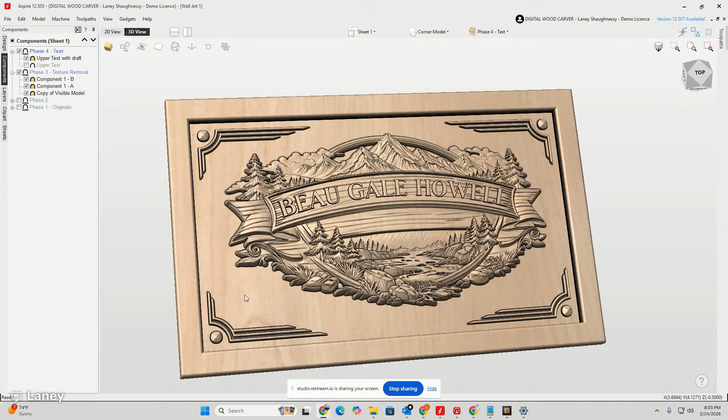So here is the sign, and we're going to talk about making these corner pieces here. We're going to talk about the text. This is the stage we were at when it all went awry, when everything went sideways. I was talking in the class, and as I was talking, I went to file to go hit save. I like keyboard shortcuts, Control S. Well, I accidentally hit the close button. Not paying attention, had no clue.

When the screen prompt popped up, it asked if I wanted to save the changes. By default, it's set to no. I did not even see the screen pop up. I just heard it, and I hit the enter key out of habit, not paying attention, and answered no to the question, do you want to save changes? So it shut down, and it was instant regret. So save early and save often. If you're into keyboard shortcuts, Control S is a good way to go.

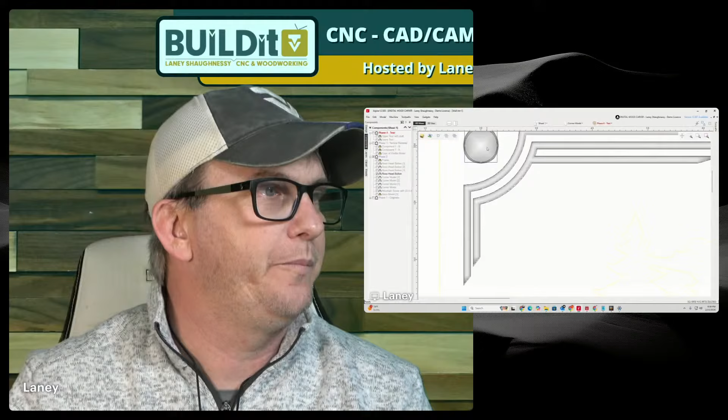We're going to come in here on this little button. Now, let's talk about the size of this. Currently, right now, we are roughly about a little over 5/8 of an inch. Okay, 0.6447, you know, we're just over 5/8 of an inch in diameter on this thing. And so imagine that little 5/8 of an inch over this 24 by 15 inch area. It's taking up just a few of those little points.

And so I'm going to take these two shapes here, and I'm going to drag a copy of them just over in this open area. And I'm going to turn off that original. Make sure I got everything turned off. And I'm going to recreate this button in this large area, and then I'm going to show you one way that we would probably want to do it so that we can see the detail and everything. Now, in the design tools, first thing I'm going to do is on this rectangle here, I'm going to use the create a smooth shape component tool.

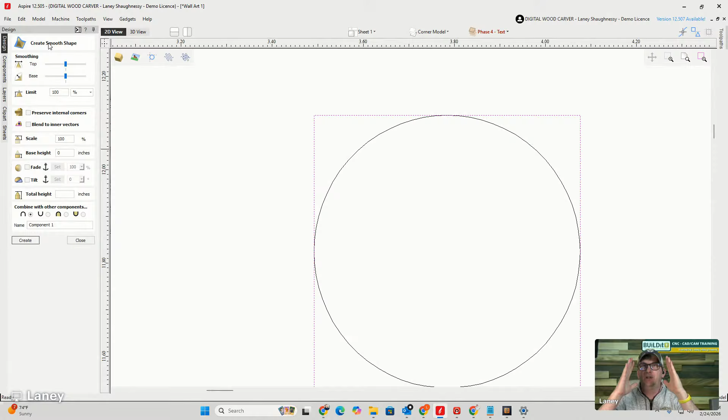And with the smooth shape tool, I can control the size of the top of this shape and the size of the bottom of this shape. And so when it comes up to this point, rounded surface and everything, I can control what it looks like. And so let's say that on this shape here, I want to go, we'll say, 40%. I want to put a base height, and let's kind of go to the 3D view so you can see this.

Also, very important, so I don't freeze up constantly, I'm going to turn this off and bring this back down. I'm going to bring it down a notch, so there's no struggling in our class tonight. Okay, let's go back over here and let's go into the 3D view. Now, it's important to make sure that whatever layer I'm working in, that layer is active so y'all can see what's going on. Now, let's go back to this component once again.

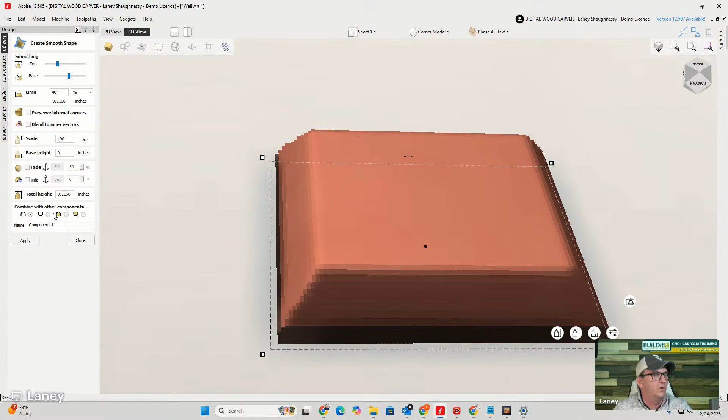All right, so here on this 40% shape, on this basic kind of rectangle, I want the top to be more narrow, and I want the base to be more wide. Now really look at what this model looks like on the screen. Right now, while I'm attempting to create this shape, it looks like something from, what's that movie that Jack Black was just recently in? Oh gosh, it's a kid's movie, but anyhow, looks like something from a video game where it's just all pixelated, right? And you really can't see what's going on with it until you let it kind of regenerate.

The shape in itself, and let's go a full 100% here on this, and let's click apply. And on the shape here, it's completely pixelated. If I was trying to model this, I'm not able to really see what's happening because this little bitty 5/8 thing is only taking up just a few pixels on this big project. So what's a better alternative that we have? Well, one of the alternatives that we have is sheets. We could create another sheet in the project, and this sheet, we could make it smaller.

So let's say that I come in here and add a new sheet. This will be my rose head button sample. And I can take these two vectors and copy them to that sheet. Now, instead of seeing this pixelated mess that I'm trying to work with, I can go over to this other sheet.

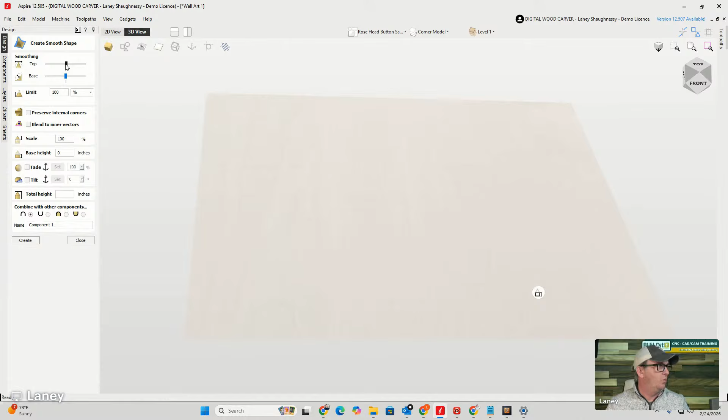Now this little 1 inch by 1 inch area is also working with that 8 million pixels, that extremely high resolution. All those pixels and points, all those rows and columns are condensed into this 1 inch by 1 inch area, which is what is going to give us better clarity when we're working with the part. So now when I'm working with this part, I can actually see what I'm creating much clearer, much cleaner.

So let's say, once again, I want to bring this down to, let's go 50%, and apply that. Actually, I don't want to limit. Limit was the wrong one. That's going to be 100%. I want my scale to be 50%. And I want to lower that down some. I want my base on here. Let's go 1/8 of an inch for the base.

And then I want to widen this out. I'm ballooning the base. So there's the top, there's the bottom. So I'm ballooning the bottom, keeping the top kind of narrow. As I slide this slide bar to the right, I'm ballooning that bottom out. Now the top, I could go very narrow, almost kind of conical, that point, or I could balloon it out this way. And I want to be right about here.

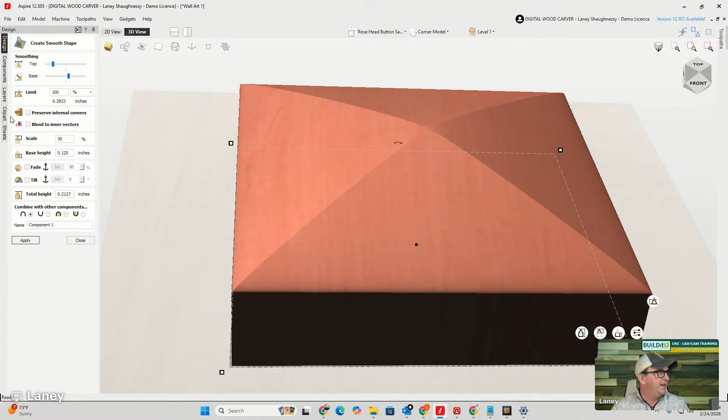If I need to preserve internal corners, that is going to make my inside corners straight and rigid. If I need to blend to inner vectors, I have that option as well. Well, I don't. I only have 1 square, and I just want to bring all 4 sides up. Want to be wide at the bottom, narrow at the top, not too narrow, where it's not pointy but slightly rounded. Want it low, think of like a head of a nail, and then I want to apply that.

But I'm able to work with this much cleaner. I'm able to see it very, very clear, so I can get my shape versus that pixeled mess that I was trying to shape over there that, every time I move it, it just jumbles up, and then I got to wait for it to reset. 8 million pixels in a 1 inch area versus 8 million pixels spread over a 24 by 15 inch area. A lot less concentration on that detail, right?

So if you have a large project and a small model area, make a smaller sheet that fits the size of the model. Do your modeling on that part, and then we can just move or copy that over to the bigger part. Now, mind you, when we bring it over to the bigger part, it is going to adopt that larger area, less pixels spread across it. But the part's already made. So we'll have a better visual.

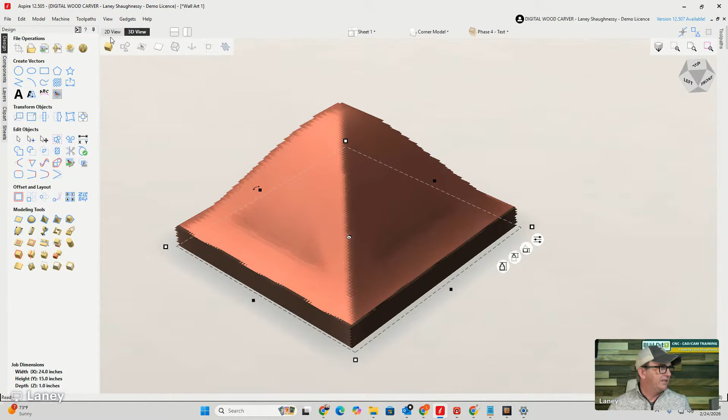And once again, just a real comparison here. Look at this versus this, right? And if I do anything at all with this part here, and I go to shape, look at the pixelation, right? We want to be able to see what we're modeling. So little tip: model in an area that's not much bigger than your model needs to be, and then we can bring it over. So let's go back to here.

And I want to add a draft to this part. So I'm going to come in here and add a small draft.

It's going to freeze me. While we're doing the draft, I had to stop the draft because I've got other models open that I need to close, or I need to make sure it's the only one I'm drafting on.

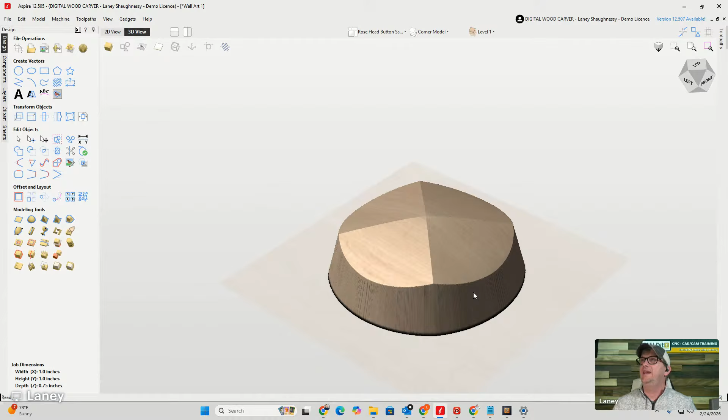All right. Anyhow, so now this is our little rose head button. Okay, or little rose head nail head, or whatever you want to call it, that we can now bring over into the design. So we can take this part and we can copy it to the sheet. And then once we have it in the sheet, then we can bring it over.

And if we come in and we take a look at the two parts side by side, that once crisp, clean, clear model that was in that little 1x1 area, which is this guy right here, is now pixelated in this larger environment. Again, small model taking up big, inside of a big space resolution.

That's why if we're working in creating modeling and everything, we want to work in a very, very high resolution because of this fact. If we were in a standard resolution in this, you wouldn't even be able to see the detail and you wouldn't even be able to see the 4 little points or anything. So keep that in mind when you're modeling. Doesn't hurt to make smaller sheets so you can really model and get the detail, and then you can bring those over to that larger environment.

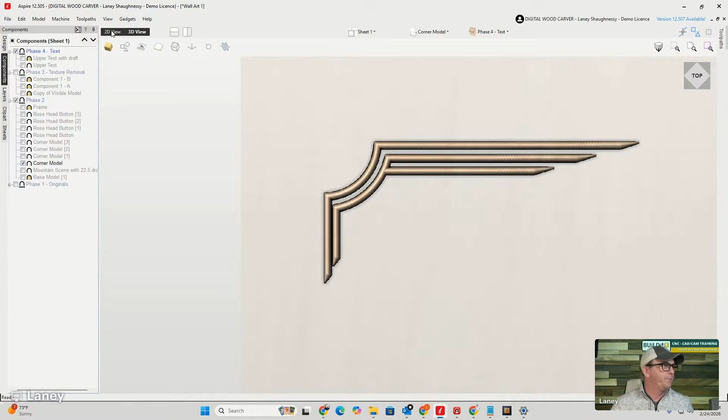All right, I'm going to show you how I designed and made these, then we'll move into the finishing of the design. So here, let's start from scratch. And I'm going to go into sheets. And I'm going to add a new sheet. We'll come work over here in this new sheet for a minute.

Now, when I do this, let's close this. When I do this, I want to make sure that rectangle, that little offset that's created, is selected, and I want to open up the rectangle tool after it's selected because I want to edit this particular rectangle. And I want to do an internal radius on it. So let's say that I do a 1 inch internal radius, and I create kind of this radius here.

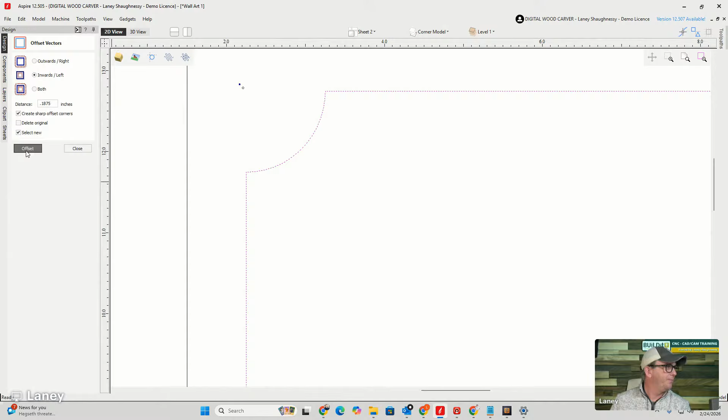Let's go. 3/16. And let me see here. Yeah, 3/16 is good. Okay. So now I'm going to do this some additional times. Now think of every two as one pair. That's going to be one model, one strip of the model. And so I want 3 models.

So I need to offset this inward. So that's going to be 1. These 2 right here will be 1 of those stripes. This will be the second stripe, and then I want 1 more. So we're going to offset inward. Okay. And this is going to create that frame all the way around. But all I care about is 1 corner, because once I make the 1 corner, I'll mirror it to the other sides.

All right. So here we're going to take a rectangle, and I'm going to decide right away how long and how narrow I want this design to be, meaning how long I want these stripes to be coming out, and then how short I want these lower ones, because that's what that corner element looks like. So I think I'm going to go just a little bit longer here, and we'll go with that. That'll be my corner piece, and that will be sufficient.

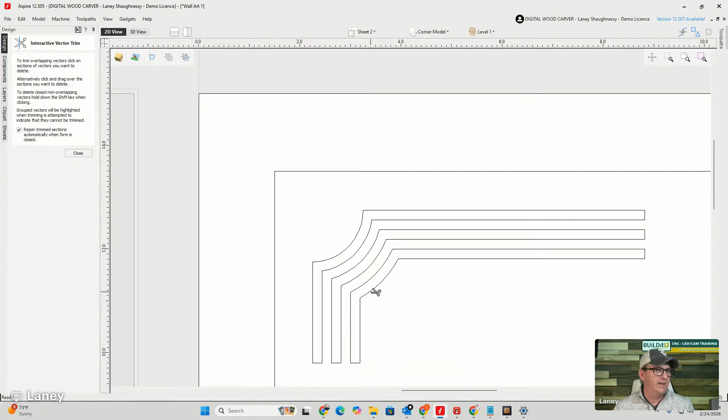And so from here, I'm going to take my scissors, and I'm going to eliminate everything else, just what's in the corner. Okay. And I'm going to come here and trim away this excess of this rectangle. Now I'm going to cut between each one of the stripes. Okay. Now there's my 3 separate stripes. Okay. So here we are with this.

Now, this particular stripe here, we're actually going to go into node editing, and we're going to cut the vector here and here where the curve starts to straighten out, on that downward motion. We're going to cut the vector in those corners. And then I actually want that to be closer to the main part here. So I'm going to just use my left arrow key, and I'm just going to bring it over closer. I'm going to go something about like that.

Now I'm going to take my extend tool, and I'm going to extend this line over to here and this one over to here. And then I'm going to take my scissors, and I'm going to trim there to reconnect that.

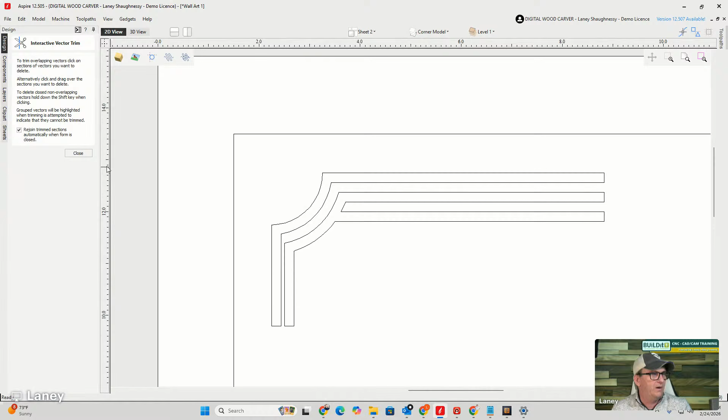Now, on here, I'm going to take this part and go into node editing, and I'm going to cut the vector here and here. I'm going to delete that lower section. And I'm going to have this with the extend tool. I'm going to extend this into this part here. And then I'm going to take the scissors and connect that together. So now I have this corner decoration here.

Now this could be conical, it could be rounded, it could be whatever shape you want. I'm going to go rounded, and I'm going to create the round, but it's too square right now. So I'm going to take a line from this top corner, and I'm going to go at a really kind of drastic angle here. No particular number and size, just what I think I would like. And let's go there just for kicks and giggles.

And I'm going to take the scissors. Once again, I'm going to cut off this excess, and then again, cut in between. So we have kind of that step shape now. And I'm going to do the same thing.

I'm going to do the same thing with a line here at the bottom. And you can try to have it the same angle. You can do whatever you want. It's whatever looks good to you, right? Whatever you think, if you're ever doing something creative like this. So we're going to cut off that corner and cut off in between there. So now this is my corner piece. Almost kind of looks like a wing, right?

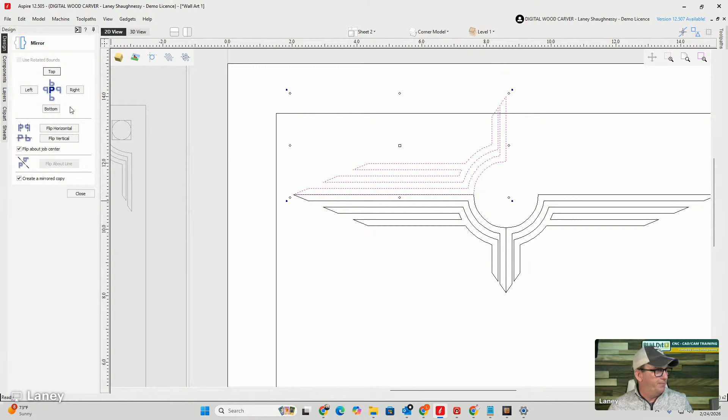So imagine, if you will, if I was doing some type of emblem, and I wanted to take this and flip it to the left to create something that looks almost like an Aztec eagle, right? You know what I mean? So that kind of effect, if you will. And let's say that I wanted to create something unique like this. It would be kind of like a medallion, whatever, right? So we're just creating a cool shape.

Whatever it is. All right, let's get rid of that and come back to our corner piece here and back in the corner. Now, when I take this corner piece, I'm going to use a rounded curved profile.

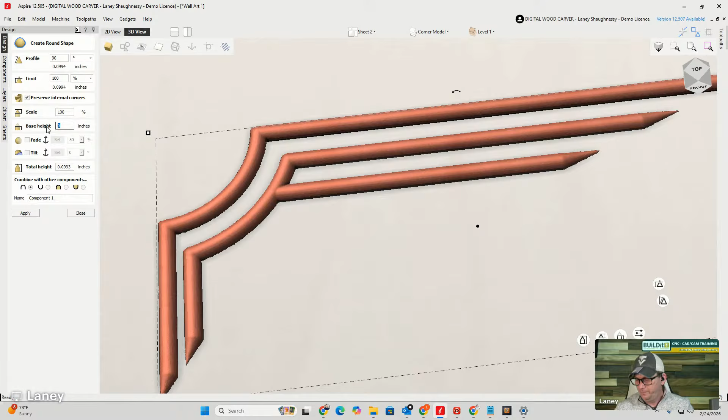Now, if we look at this part, this is kind of where we're at right now. Okay. Now I want to add a little bit of base to this. So on the base height, I can add 1/8 of an inch, 16th, something. I don't want too much base, just a little base. It's all about that base. Okay. So now here we are.

Now I'm going to take that part and I'm going to draft it out. And on this draft, we're going to have a little bit of a freeze up while it drafts this part. Audio loss, little freeze up and all that stuff. So give me just a moment and we'll make it happen. Here we go. Not that bad this time. All right, so there's our draft on that part.

Now let's go over to our rosehead button here, right? And let's copy that over to that other sheet. Let's bring that up into play here. Now, if I wanted to know where the center of this was so I could get it centered perfectly, if you remember, this original line here was a 3/4 inch radius internal curve, right? So I could take a circle with a 3/4 inch radius, and I could bring that circle... Oh, sorry, it's not a 3/4 inch radius. It's a 1 inch radius. There we go. And I could bring that into position.

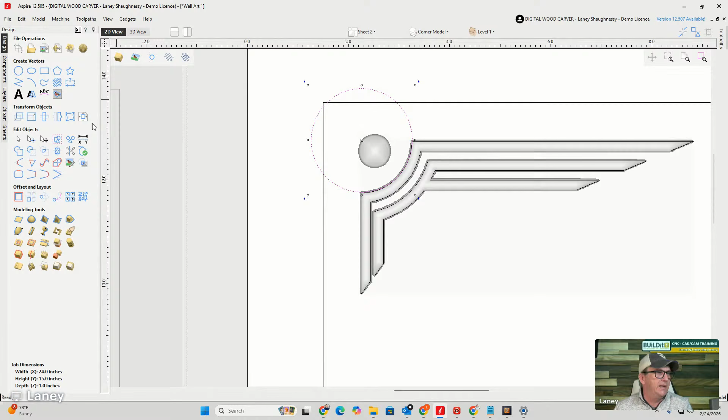Like that. And then if I wanted to, I could take this piece and snap it to the center of that circle, right? If I wanted that to be that far out, if I thought that would be more aesthetic looking, but I honestly think it looks a little bit better closer, so I'm going to bring it in closer. Now I am centered on this radius. So I could draw a 45-degree line here, and I could have my part follow that line to come in closer, depending on where I wanted to push it. We'll go right there. Get rid of that line.

And then I'm going to take all three of those parts. I'm going to mirror them, creating a mirrored copy, flipping about job center. I'm going to flip that horizontally, vertically, and horizontally again to create that little corner decor, right? So that's how we created that little corner decor.

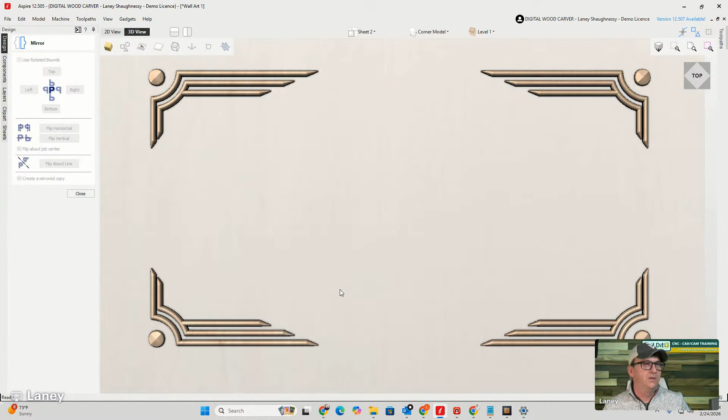And so going back to the main project, when we turn on the components, that's what brings us to here. And you add that together with the 1.25" frame, the 3D model, and everything, and you're starting to get something that looks pretty decent.

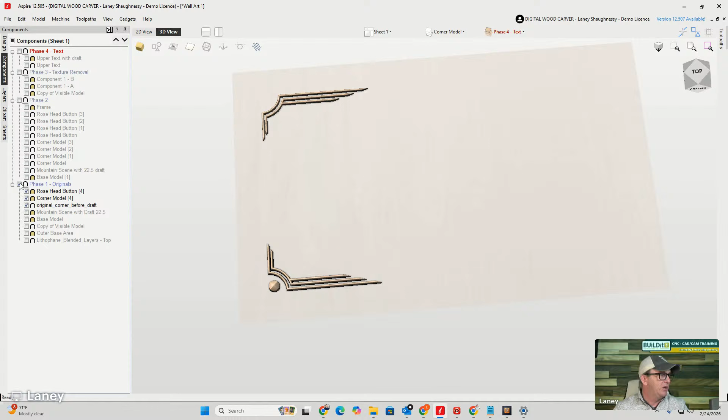So with the originals in phase one, we can create what's called another level, a new level. So in the case of this, these originals are turned off, and then phase two begins. Now, phase two is everything you see here. It's almost the completed model, everything put together, minus the text, right? Phase two is building the frame, the background, the little corner pieces and everything, and getting it all laid out.

Once phase two comes into play, now I'm going to have to start removing this grain on the ribbon so that I can lay the text on there without it taking on the texture that's underneath it. And in the last class, Friday, we had gotten that far, and I was showing you how to remove the texture and then how to tilt and fade the little addition we added in there to create a smooth foundation. We're going to do that really quickly again tonight, but this is phase two. So now we have here, this is that completed frame.

Now in the next phase, I have to start destroying that ribbon, getting rid of the grain, cutting it around the letters and all that. Don't want that to happen to the original. So we create a copy of the visible model and we put it in phase three. So we come into phase three, turn off phase two, our originals, and come into phase three here. And you can name it whatever you want. I just named it phase three. And phase three is that copy of the visible model that was down below from phase two transferred up here.

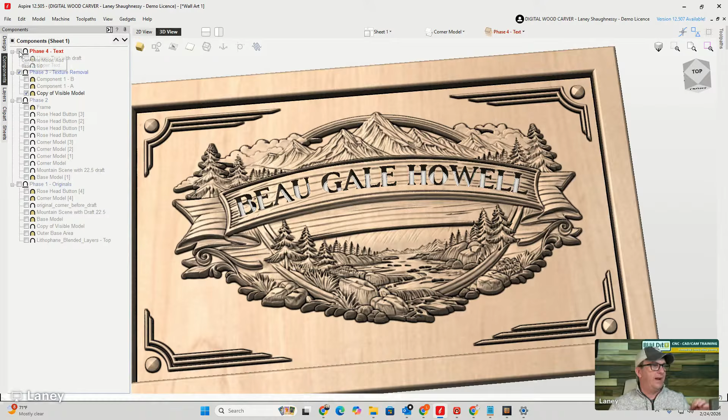And let's say that I created phase two, which is the completed frame and everything. Now phase two could be my template for anybody's name and wedding date, or family name, or it could be anything in this banner now, right? Not just this one name I'm doing on this one project. I now have a completed frame that I could put any text on, any name on. So in this case, phase three is the texture removal. That's what I named it, texture removal. And then phase four is where we're adding the text back and everything, right?

Now, I want to show you in here on this text one of the things that had to be done in order for the text to lay as cleanly as it is. And again, we're gonna move on.

Man, time is flying. It's already 51 minutes into this class. Lord of mercy. I thought 15 minutes at the most. All right, so hang with me tonight. We're going to get through this.

So let's talk about this, because I want you to know these phases before we get into the final toolpathing and stuff, because we're going to do one more set of text down here that's already ready to go. But let's take a look at phase 3 for a moment. If I turn off the text here, we'll see that phase 3 has had the texture removed, and it's brought up a certain level so that our text can lay on top of it to create that flat surface and everything.

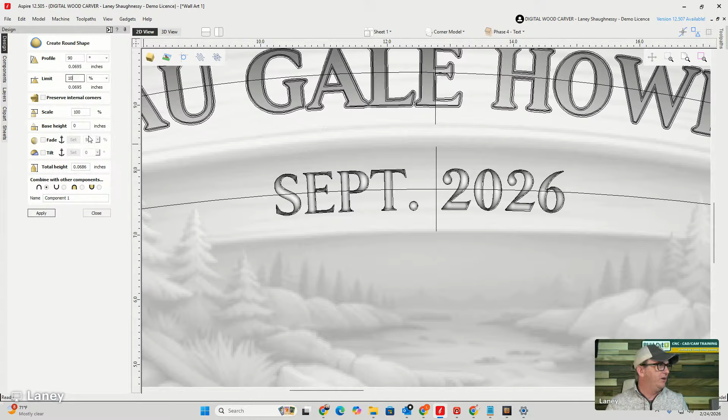And if I didn't do this, let's say here on this September, I come in here and I'm going to build this up 90 degrees. I want rounded over edges. I'm going to cut that 90 degrees off at 10%. I want it to flatten off at 10% as it builds up to that dome. At 10% of that build, it's flattening off, and that's going to give me rounded over edges. And I like adding a little 1/16 of an inch base behind it.

When I apply this and we look at it, we can see that the September and the 2026 are taking on the rough grain beneath it, right? So our goal is we want that smooth versus this rough and hilly, lumps and bumps and all that wonderful jazz. So in order to do that, we made some extra vectors going on here.

So the first thing is, once the text is created, we want to add the draft to it. And then we want to create a vector profile around that text for the draft. And so we're going to do that with the September. We're going to right click and say show only this. Let's try that again. Show only this. So that way we're looking at this text here. A little rough around the edges. But we're going to come in here and add the draft to it. Okay, and what that's going to do is just build it out some.

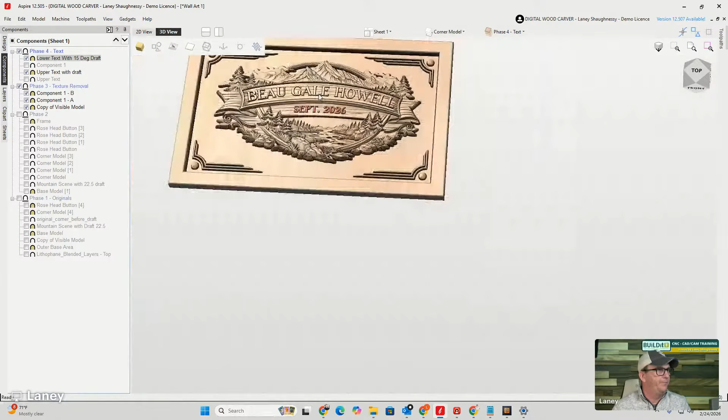And what I want you to see here, let's turn off the lower text just for a second. On this upper text, turn that off for a second. Here, you're going to notice there's component 1B and 1A. Those vectors that filled in that hole with the flatness, because they are at different levels, it was split. The model was split into two pieces.

So this component is, let's turn off the copy of the visible model. Come back. 1B is one side of this model. 1A is the other side of this model. It was split, literally like a line cut right down the middle. And the reason for this is so that not a tilt, but a fade could be applied to this, because it was low in the middle, high on the ends. Creating a fade makes the model disappear, so it actually lowers at the end. We'll do the fade on the next one.

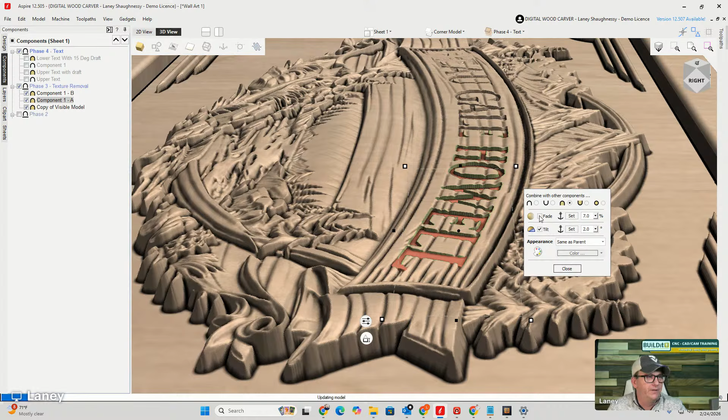And let's zoom in on this part. If I were to go into the properties, we have a 7% fade. Now, if I turn the fade off, you would see how it's low below the surface here, but it's high over here.

Naturally, because it's kind of straight, but that ribbon gets a little bit smaller as it goes out from the center of the actual part, right? So the 7% fade faded from the start of it to the end, faded away. And you can only fade the component once. You can't fade it twice, only once.

So that whole name, Beau Gale Howell, had to get split down the middle so I could put a 7% fade on the right side and a 7% fade on the left side. So from the center, it would fade both ends, dropping them down, disappearing into the other component. So that 7% fade just fades away and levels it out, basically, depending on what percentage you use.

If I would have kept the whole name as one model, I would only be able to fade the whole thing. And that's not what it needed. If I tilt it, it's like a teeter-totter, or if I fade from one end to the other, that still leaves this end high. So I had to split the model. And there's different things that you'll learn that you have to do.

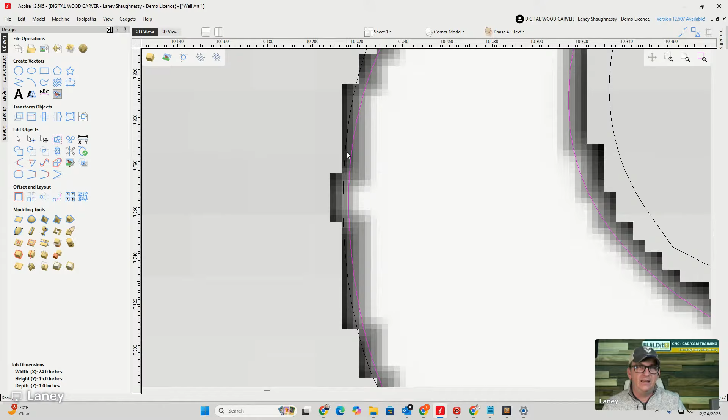Now, if I create that profile here, it's fine, but it really does not bring it out the way it needs to be. Parts of the model are still outside of that vector area. So not really the way to go. I need to offset this. So we're going to use the offset tool and offset outward a very small number, 0.01, 0.02, 0.03, whatever you need. When we take away that material, it's got to blend with the rest of the model so there's no holes or gaps.

So if I only went 0.01 and offset that outward, any area that's outside of that vector... So here's the vector here, and on that offset, there's still part of that model there. And now when that gets gone, anything outside of that vector is going to be a hole, so I need it to merge and blend.

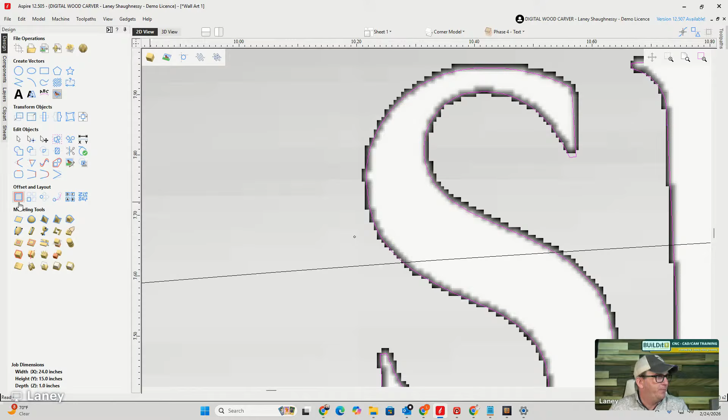So here's how we do this. First things first, we create a vector boundary around the selected component. That is step number 1, and that's what we use to remove the texture. But then on that boundary, we need to do our offsets outward. 0.01 isn't really going to fill in the area that I need to get the merge.

So I'm going to go 0.02. Let's go 0.03, a little under a 32nd of an inch, and let's create that here. And that's actually a lot, so we don't need to go that much. Let's go 0.02, be a little conservative. Good. So now we have 2 sets of vectors. The first vector is what we use to remove the texture. The second, the offset, is what we use to build back up the flat area.

So the first vector is selected. We come in here and select our component, which is the copy of the visible model. We have the vector selected with that component, and we want to remove everything inside of the vector. And that creates this hole.

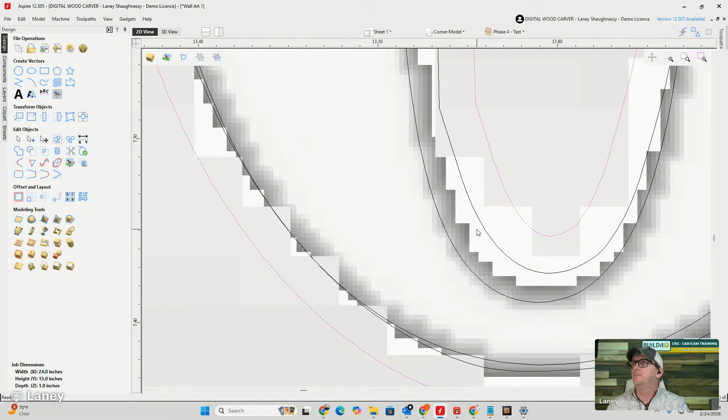When you're selecting the inside vector, if you do an offset, it's always the furthest one in for the furthest one out. Okay, so here I've got 3 vectors, and outside I've got 3 vectors. And so outside matches with inside, middle matches with middle, inside matches with outside, right on that. So if you ever have to do that.

Now, as I look here, you see that 0.02 doesn't quite get out there. So all those little white areas are going to be holes. That's why I went to that 0.03 to begin with. Because that's going to be a hole, a little bitty void. Small, but it's going to be a void, right? So we can't have that.

So I'm going to delete that offset, and we're going to make another one. Offset outward 0.03. I hope if I select the right vector, there we go. So now we can see all that white is inside that vector. Now that's the shape we're going to build up. So let's go in.

We're going to create a flat shape. I'll just give it some kind of base height to start with. Merge, not add, but the combine mode is merge.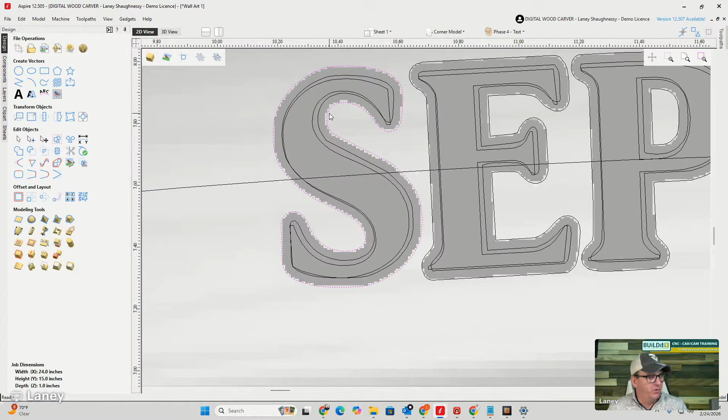It's very important that when you do your offset, let's back up, Jack. When you do your offset, hit group, select on it. When that gets created, click on it one time and then hit G on your keyboard, or go to the group tool and group that together. That way you don't have to sit there and click, click, click, click, and all that stuff.

All right, now it's very important to make sure that only this is selected when we build up that hole. So flat shape. I'm going to give it some height, 0.25. We want to merge that together. Okay, give it a second to rebuild. What you're seeing here is it's pushing up the sides because it's not merging.

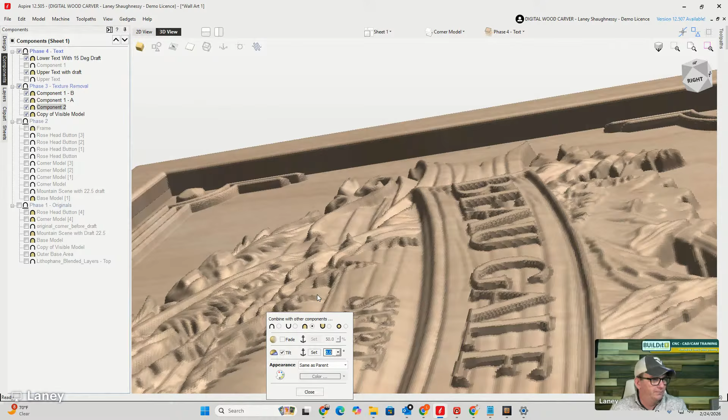So on the tilt, when we hit set, up here, we're going to click first because that's going to be the thin part of our wedge. And then we drag our little guideline down to here. That second click, the anchor has a number 2 at it now. We're going to click down here. And this way, when we add our, let me get back into position here. My mouse decided to take over.

When we start to add our tilt and everything, and again, that picks a large, small model, large area, but we have no choice in this situation because we're dealing with this big model in the background as well. So the tilt, I'm going to bring it to a 4-degree tilt. And then let's close that for a second. Let's come back in here. I need to bring my height up again. Start to kind of fill that in.

Now, currently right now, these little pixels and everything around, that is the model kind of pushing up, and there's some areas here that are kind of getting forced up with them. We'll get rid of those in just a second.

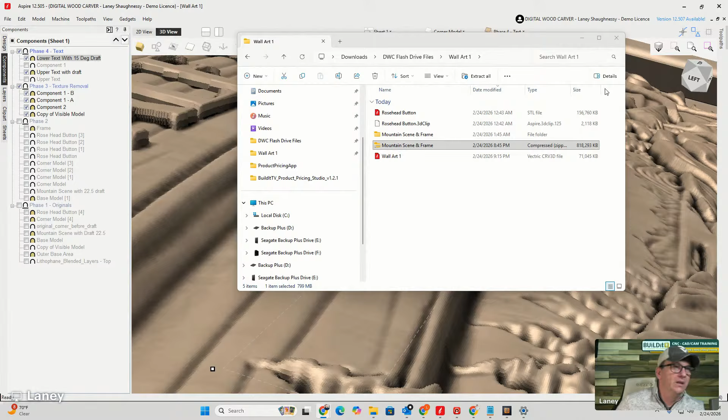Let's take our text for right now. Let's turn off the upper text for a second. Let's take our text and turn it off. There we go. And it's very important that, let me step back for a second. Let me change my base height. I think I was manipulating my tilt on my text, not my actual component. Give me just a second. Okay, let's bring that back up.

Okay, so once again, let's get back here really quickly. You see how high, because that model tilts down, right? And so we're high here and we're low on the front side of it. So if I put the text on top of it, it's going to be tilted like that. We don't want that. So I want to make sure that when I'm tilting, that I'm tilting this and not my text. I was tilting my text a minute ago.

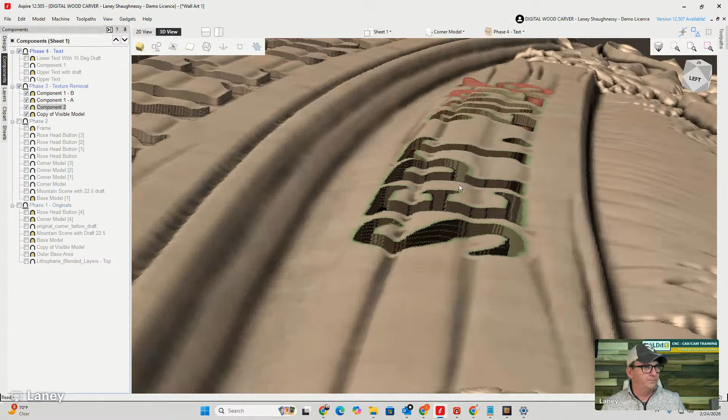So when we come here, we're going to click again up here at the top, down here at the bottom, and then we're going to add in that tilt. And what that's going to do is it's going to kind of level us out somewhat. Okay. And let's go with just a 4-degree tilt right now. And then I'm going to lift it back up.

Now, look here. I'm kind of the best I can be pretty much, I probably need to tilt back a little bit just to level this out a little bit more here. Think of it like I'm trying to create a straight plane, but notice how much I'm raised up over here. So if we turn this around, you can see that it's going at a ramp, right? And that's because the model's designed that way. That mountain scene is kind of going down.

So if we come in and look at this straight on and just tilt it straight up, you can see there's a ramp there. This is where fade comes in. The reason why is because I've already tilted. You can only tilt one time on the model. Now, here's the thing. I'd like to get this down, but if I fade, it's gonna fade gradually from one end to the other, right?

So if I put a fade on this whole thing, and when you're setting the fade, the area you want to keep is clicked first and the area you want to fade away is second. Okay. And by default, it jumps to 50%. Turn that 50% down.

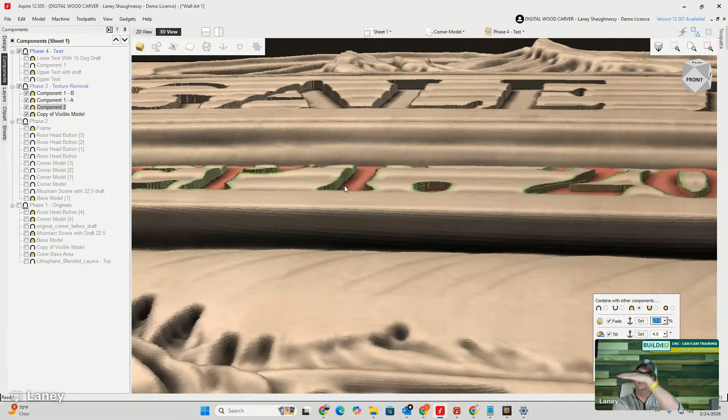As we come in here and fade, when I start to bring this side down to where it's somewhat inside there, well, the middle, it's really low. Instead of a full ramp tilt, there's a little bit of a wave there. So this is the perfect opportunity or the perfect reason why we would want to split a component.

So on this component, I'm just going to use this line that's already drawn here. This line was not meant for the split. It was drawn to represent a center line from point A to point B to create the center point of my arc, so that I could move this arc up and down to the center of this line. But since that line is there, might as well use it.

So in that component here, not the text, the filler. And speaking of that, let me give this a name. Rename. This is my lower filler. Now, I'm going to have that selected and this line selected, and I'm going to split this component. It'll split the component into two halves at that line point.

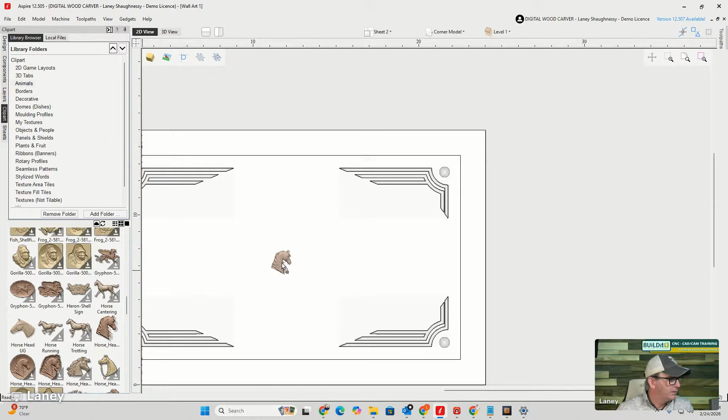What I'd like to do for just a quick second is move over to sheet 2, and I'm going to take a piece of clip art. I just want to really quickly demonstrate the use for the split tool. We see this component right here, this horse's head. I would actually like this horse's head to tilt a little bit more down. So I can freehand draw, going right at the base of its jaw, around the jaw, and then come up just right behind the ear.

Okay. At that point, let me bring this down past this model a little bit. I can take that component and that line, and I can split that component. So now there's two parts.

Now on this component, if I move the pivot point right to the back of the neck here, as I rotate this, first of all, don't grab the wrong point. This is the rotate handle, not that one, that's the size handle. As I rotate this, I can tilt the head. I actually want the head to tilt down a little bit further, so I'm going to go right about here.

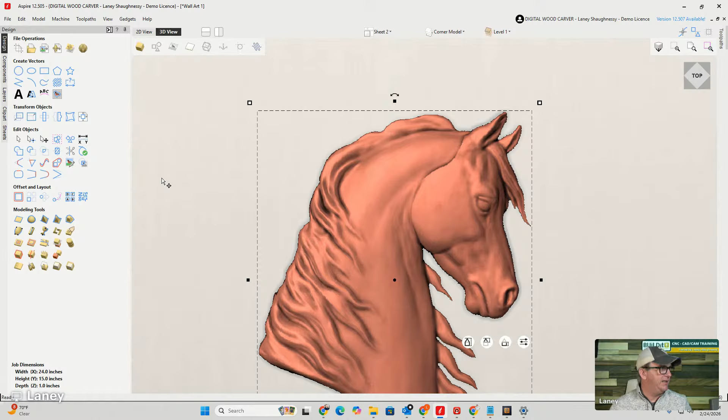And then I would be able to turn off everything except for the horse heads, and make a copy of this visible model. Turn off the two originals, and then I could take that copy into the sculpting tool. Turn the diameter down some. Oh, not smoothness, the diameter. And then I can start to clean up where the two parts were split. So now I have this horse with his head slightly tilted lower.

So that's the split tool. I can take a component, a model, whatever, draw a line, tell it to split, and it's going to cut it on that line. Then I can manipulate the two parts. That's just a quick and simple example of the split tool. All right, let's get back to business now.

So here on this text, I have split the Sept with the period and the 2026. Now, each of these components, filler A and filler B, are two separate fillers. So now I can work with them.

Ooh, I got an itch in my leg.

I can work with them individually. Let's do the 2026 first. On the 2026, which is filler A, I can tilt and fade these independently. And so we'll deal with the tilt first.

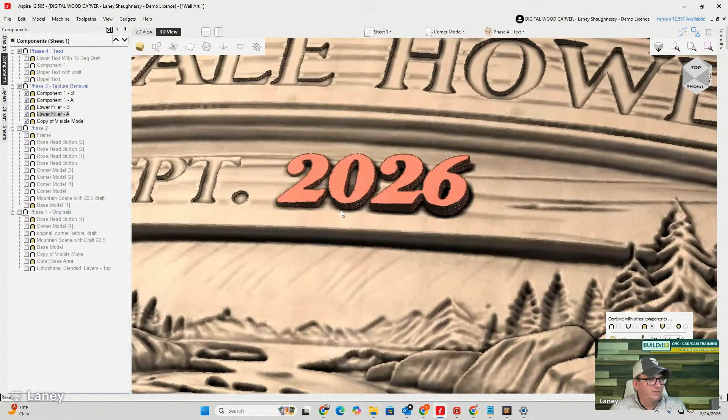So we can fade now, and it'll start to bring that down, right? Starts to disappear, starts to fade. Bring it down. So what I want to do is bring it to a point where I'm somewhat, again, level. Then I can work my height to bring it down a little bit closer to the surface here.

Let's actually go down just a little bit below. Okay. So that when I put the text on top of it, I'm inside of that area and it'll blend much better. Okay. So now I still have to do the left side, A. So let's turn the text off and let's go to filler. Let's see. That was filler B. Filler B. This is this side.

And again, we can see I'm deep down here, kind of high up here. Oops, don't move the model. Put it back. So I need to tilt. And for right now, I'll just raise this up to where the bottom is somewhat close to that surface. And then if I turn this to the side, you can see where I'm at here.

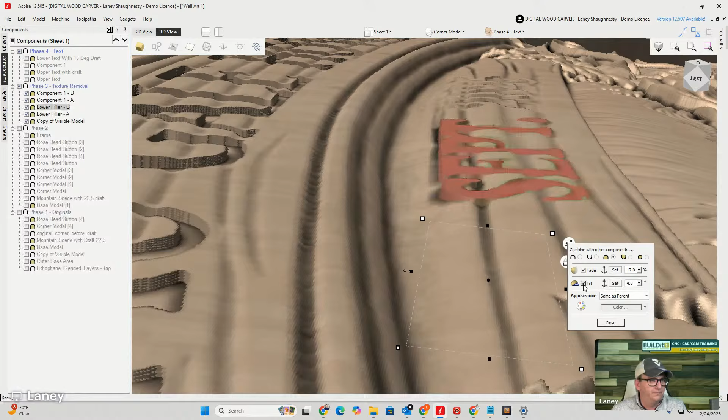And more so, it's not really a tilt, it's more of a fade, but that's okay. Because I have some different levels here. So I kind of want to fade one way or the other. We'll figure it out in just a second. But I'm pretty much leveled out here. So if we go into here on this component, that tilt is still there. Okay. And the fade is still there. Without the fade, this is what it looks like. You see that ramp. So that fade is still there.

And what I just need to do is really, let me come here. What I really need to do, this looks pretty well level here. I need to actually kind of switch it up. I want to fade this way some, tilt the other way. So we're going to go tilt. And this is the thick part of the wedge. This is going to be the thin part of the wedge over here because I need this to stay where it is, but I need to jack up the other side.

So thin part of the wedge on that tilt is here. Thick part of the wedge is over here. All right. And then I adjust the tilt accordingly. Let's see if you can see this. Kind of get it leveled out. Then get it brought down to my surface. And you can see, let's zoom in here. You can see that height there. Fade is going to go this way.

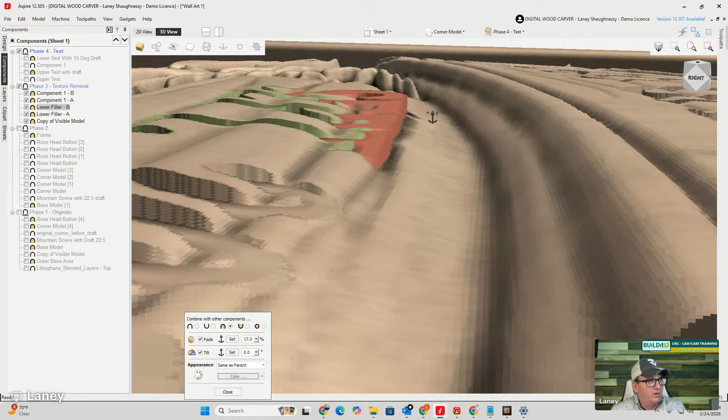So we come back into here. We turn on the fade, and our first click is going to be back here. Second click is going to be over here. This is what we're fading to. Turn down that fade. Bring myself back up. And then we'll adjust the tilt.

You got to pick your battles. There's only 2 directions it can go. We definitely don't want that. Now, let's turn that fade off for a second. Let's bring this back down. It's kind of jumped up the part there.

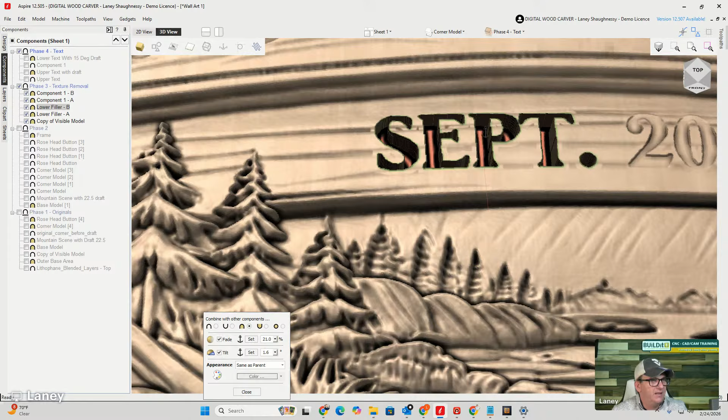We're going to keep the fade here. We're going to fade it out down here. You can see now we're kind of starting to somewhat level out at that top. That's going to be good. We'll raise this up. Almost done. Raise that up.

Take the tilt. It's a little game of playing around here. Get everything leveled, get everything tilted, get everything adjusted. And that's going to give me the best all-around fit. So now add the text on top. Add the text to the top. Zoom out.

Okay. Now I'm going to take a second and hit save. Let it save. We're almost here, this is our end part coming up. I'm going to open up our settings and go to a maximum resolution. And when I click OK, it's going to rebuild this model, just so I can show you guys the text and everything a little bit cleaner.

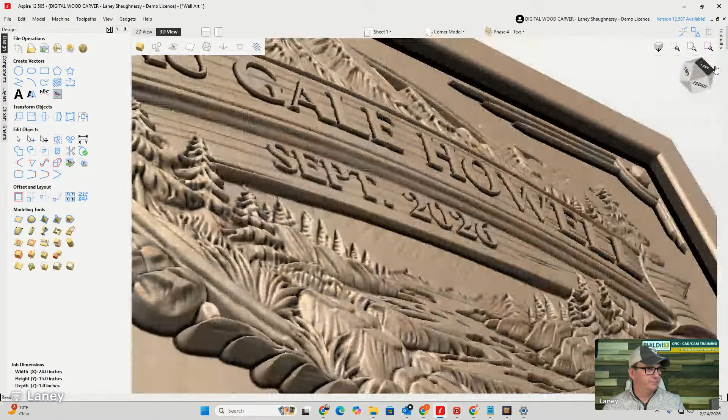Okay, so even though my ribbon has got its shapes and everything, it allows my text to be fairly consistent throughout. So tilt, fade, split, all kinds of stuff going on, right? All kinds of cool stuff going on. Okay, let's save this.

All right. Now, this is important. You get your text the way you want. If I said to myself, oh, I should have taken that September 2026 and made it larger, right? Made it a little bit bigger. The reason why I didn't make it bigger is because in the original image, I had a little bar going here and here on both sides of that 2026, and I've left it out of this one.

But let me see if I can show you. So you see these bars here, here, and here, right? The date was going to go in the middle of that area there, but I'm leaving those out. I'm not putting those back in, so I'll leave that out for now.

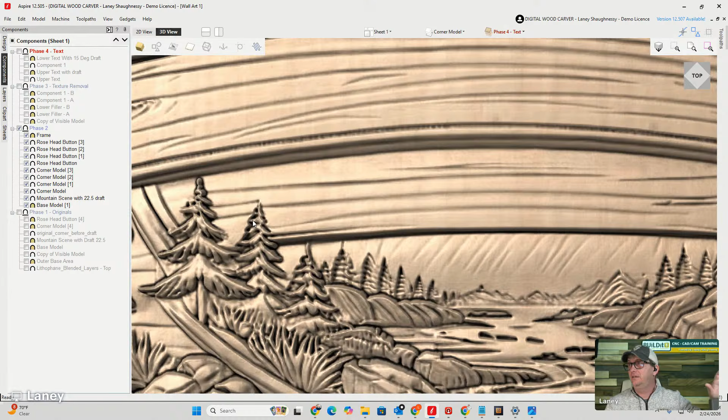The upper text is fine. I just have to bring another clean copy up. I can still use the models for the upper text. They'll blend with this model just as the other. It's just the lower text I have to rebuild. Make it bigger, take away the material, put the material back, level, tilt, blah, blah, blah, just with the lower text.

The upper text and everything, I just turn on the different levels here, and I can still add with it, whether it be the lower text or the upper text. If it was the upper text, let's say this was my model here, I could come in and turn on this level and turn on the A and B. Wait for it.

And then let me do this the smart way. I've got to first make a copy of this model. It has to be in the right phase. So I could come in here and turn on the copy of that model. We can hide this and that. We have our upper text.

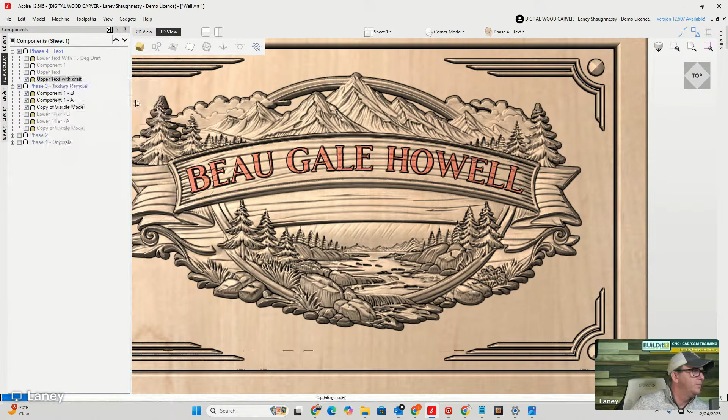Make sure that... wait for it. Bring that in, and the... give me a second. One second.

Oh, I'm a goofball. I have to take away the two vectors from this new model. It hasn't been reversed yet. So long story short, I could start over, and here I have to go into the vectors and simply remove this set of vectors here, the outside, remove those, bring them back, and then everything will be back to normal. But I don't have to start completely over. I just have to step back a level.

Now, of course, we're not going to do that. We are already at this phase here, lower and upper. Okay, so we're here. Now, so you're not confused, the copy of the model that I just brought back up, I still have to take the vectors and remove the material from that component, the letters, but I don't have to rebuild those components. They're still there. I just have to remove the material. And then those other components, component 1A, 1B, and upper text will sit right back on there.

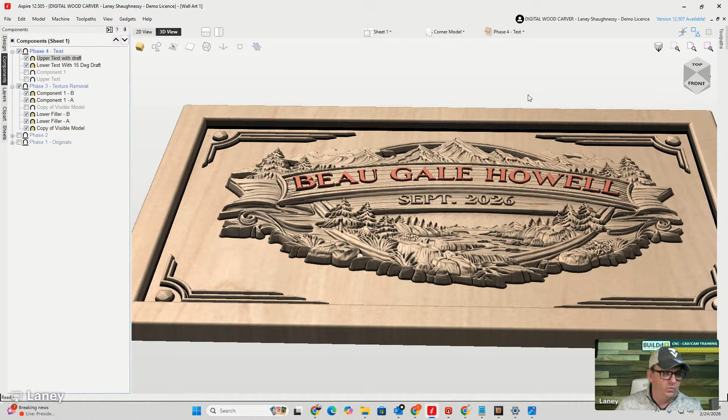So we'll talk about that more in just a second. Let's go over to our toolpath. So here, I want to get a clean set of vectors for everything. And so I'm going to create another layer, and I'm going to call this my machining vectors, toolpath vectors, whatever you want to call it, right? And what I would like is the outside vector of this component, not that one. None of those. I want to turn all those layers off, hide that for a second.

Let's take, we don't need, turn this off for a second. If you remember, everything was drafted, right? So it's a whole other part. And so these corner vectors, let me get rid of all of these vectors that do not belong. So this, that, over here. And it is much better if you organize your layers as you go, don't wait till the end, right? So we're going to move those to a new layer.

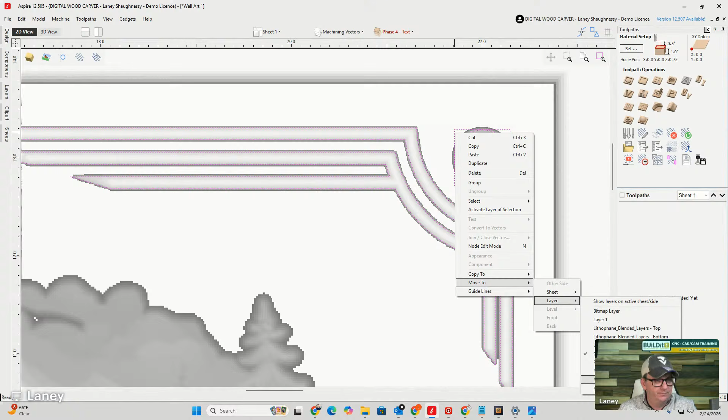These are going to be my corner model vectors original. And then I'll have a corner model vectors with draft. So these are going to turn off. Hide those. Let's go down here. Select, not that. Come over here. Putting these vectors on that layer as well. Move to layer, corner vector layers, hide those.

Now, on those corner pieces in my component tree, that's these parts here, we can turn off the frame just for right now to take away any of the confusion. We can turn off the mountain scene. We can turn off everything just so you can see what's going on. Just these corner pieces. These are drafted. So I want to select them.

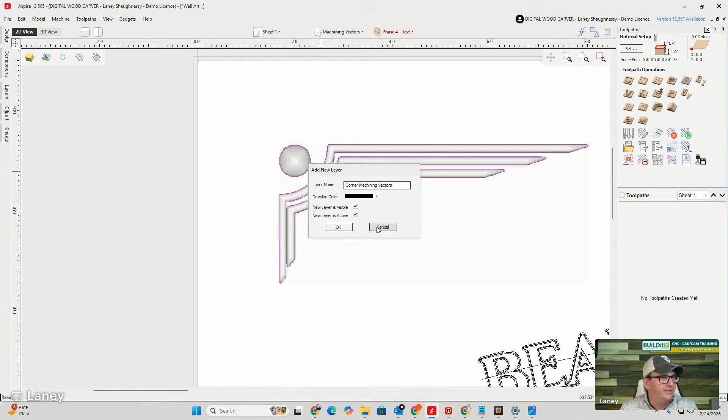And then I want to create a vector boundary around the selected components. Okay. Now, these vectors, click them right now, they're grouped together. When it created them, it grouped all 4 of those together, but that's my machining vectors, right? So I want to come in here and move those to a new layer, and this is going to be my corner machining vectors. And we'll keep those on because we're about to use them.

Now, turn those off. Instead of clicking them one by one, you can always turn on the model you actually want to work with and tell it to show only this, and it'll turn everything else off and leave that on. But this is the text vectors. We're not machining those. They're good, right? Because they're part of that model now. So we can go ahead and move them to a new layer, and this will be our text vectors original. We'll just call them text vectors because they include everything. We'll turn those off.

We'll come in and turn on our emblem. We want the emblem with the draft. So let's look at that in the 3D view. This is the emblem with the draft. That is correct. And we want to create the vector boundary around it. So select it and create that vector boundary. All right, wonderful. Move that to a new layer. This is our emblem machining vectors.

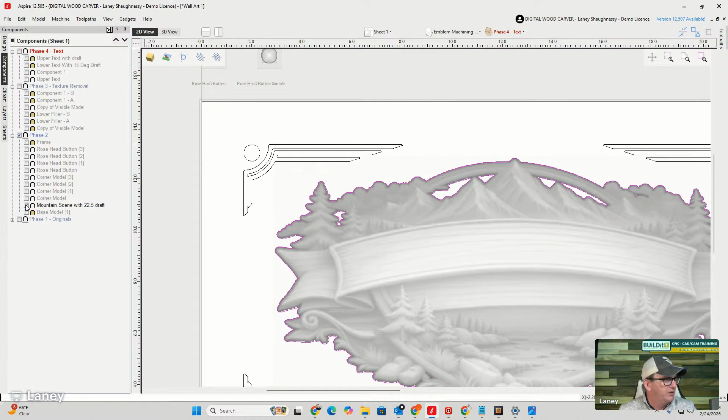All right, so we got the emblem machining vectors. We can now come in and turn that off. Let me get out of this side over here, so I can keep this locked open. Turn that off. So I got that vector. And then our frame, there's no draft on it. So the original vectors that were drawn for the frame, we can use, because they go right on the inside, and all I need is the inside one. I'll take the outside one too.

Copy those. Now these are going to get copied to a new layer, and this is going to be my frame machining vectors. Ooh, frame, F-A-R-M-E. We'll leave those on. All right, let's turn off everything except our corner machining vectors, our emblem vectors, all machining vectors there. Everything else, text vectors can get turned off. Let's see here. All the original stuff.

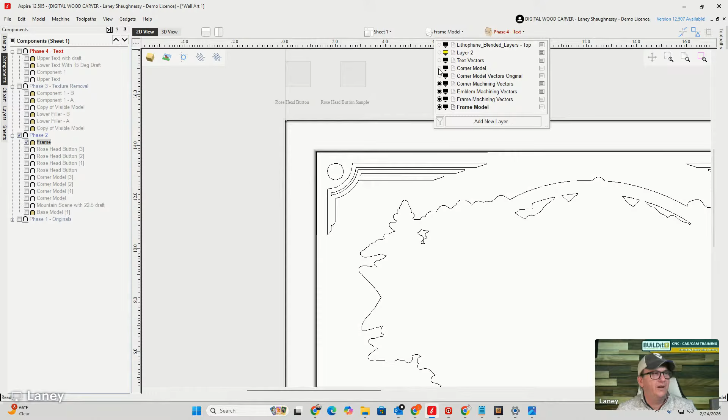So I could add in a new layer and say my frame model, right? And on the frame, I can move that to a new layer, that frame model. So this way, if I turned off the corner model, the frame still stays intact. All right, so now I've got my layers and what I'm working with. Now I need to turn on the model that's getting machined. That's my upper text with draft, my lower text with draft. We've got component 1A and B.

Let me rename this really quickly. Instead of component 1, it's upper filler. That's the fill-in area for the upper letters. Upper filler B. Upper filler A. Now, stay with me really quickly. I'm going to hit save, file save.

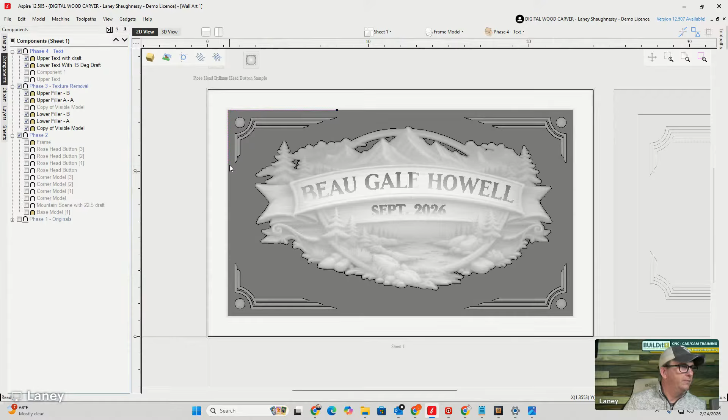All right, so, okay. Now, let's look at our 3D view. And this is our finished model. It's visible. Now, if you notice on the screen, I now have vectors that I can work with, okay? And on those vectors, there's my inside vector. My inside frame vector got cut down to a corner piece.

Hold on a second. Let me offset that frame model vectors, frame machine vectors. Let me offset a new one inward, 1.25 inches. Offset inward 1.25. There we go. Okay. So now I've got these vectors I can work with.

So now I can choose to do a pocket cut, have the vector selected so it removes the material, and then I can focus my 3D cuts just on the model areas instead of doing the whole finish cut all the way across this big old 24-inch piece. I could just focus it just in the model areas, and in the center, all the flat area is already machined and milled down. And so I want to do that.

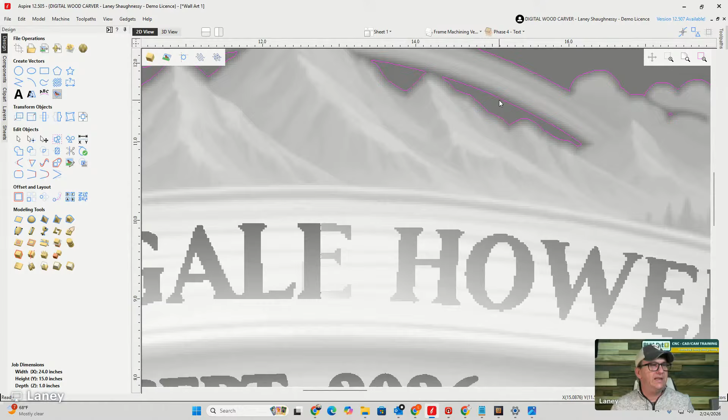And here, I want to make sure that little vectors that don't play a role are not part of the mix, and the things that are. So let me hit the U for ungroup. I'm going to turn this one off, hold the shift key down and click on it to turn it off, because I'll delete it in just a second. And I'm also going to turn off these inside ones because I might not need them in the actual pocket machining. I'll decide that in a minute.

Let's make sure there's no others. G to group this back together. And then I can come in here and just delete that. I'm not going to delete those, but I'm going to delete that little piece one. I don't want that in my mix. But now I can come in and create the vectors that I want to machine to do my pocket cut.

So here on these, think about this. If I'm doing this pocket inside here, it's going to be machining between here, skipping here, machining here, skipping, machining, right? But where it can't fit, it's not going to machine, but that's okay. That's our finish cut. We'll fix that up. So I want to select this outside rim and the inside border vector, the corner vectors. That outside rim I'm going to leave undone because my finish cut will clean all that up.

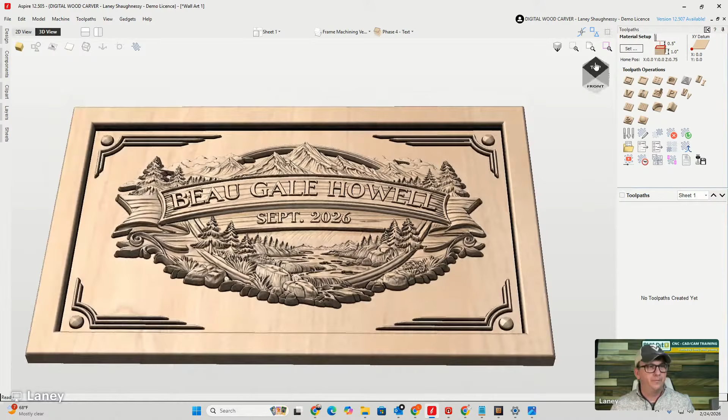But that's not how deep my pocket is, right? So my model's positioned correctly. That's important to have set properly so that I can acquire my correct height. So when I click OK, now in my 3D view, I can hover the mouse over my flat area and you will see here the top of my flat area, not the top of my board, says 0.6332. Okay, 0.6332.

Now, from here, this is 3/4, right? The top of the board. So it's 3/4 inches thick. I'm on this 0 here, going down 0. The top of these little corners are 0.4. This plate is 0.63, that kind of thing. So that's how deep it is, 0.6332 in this flat area. So my pocket cut is going to have these vectors selected, the corner vectors, the inside vector around the outer perimeter. It's going to cut 0.6332.

Hello, Laney. How are you doing, girl? Go lay down. My dog. Yes, she has the same name as me.

All right. We are going to, let's go back in here. And again, if I move that mouse, you can see the number.

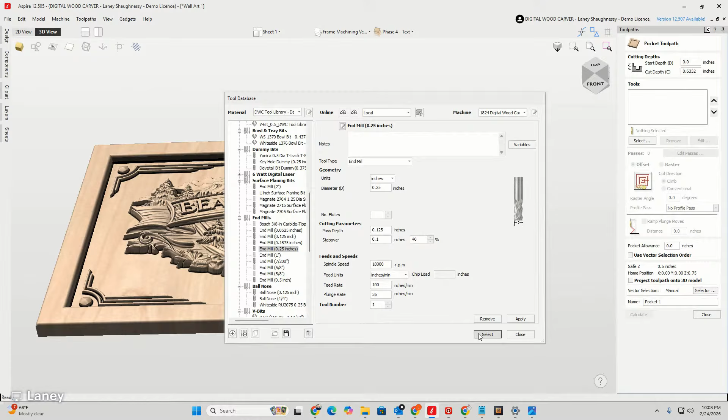So here we'll just start off with a 1/4 inch end mill. And then after I calculate it, I'll add in maybe a 3/8 or a 1/2 inch and see if there's any variation in the time, and I'll make a judgment call at that point. So here we go. 1/4 inch end mill is going to be the first bit. Then there's going to be an 1/8 inch end mill, just cleaning up where the 1/4 inch couldn't fit. So we can reduce the number of passes on that bit to probably just one pass.

The 1/4 inch bit's going to be the workhorse. It's going to be doing the most. And the same thing, vice versa. If we had a larger bit, we could step down the passes, because if all the wood's gone and we're only taking a small amount of material to do a little cleanup in the corner, there's no sense in doing that in 3 passes when the bit could absolutely do it in 1, because the majority of the work is gone.

So right now, the 1/4 inch end mill, as it's currently set, is taking 5 passes, 1/8 of an inch per pass. Depending on your machine's strength and rigidity, you could absolutely reduce that down, which reduces runtime. On my hobby units, 5 passes would probably be the basic cut. On my commercial units, I'd probably do it in 1 or 2 passes, but I am going to increase the passes because I want a cleaner finish.

The less labor that I have to add to this price, the better off for me. So if the machine does it, that's fine. I can let the machine run a little bit longer if it has to. So this will be our main clearing pocket, and it really brings it right down to that finish level. All right, so we're going to calculate that, and then we're going to be able to remove all that material around the models down to the absolute finish level.

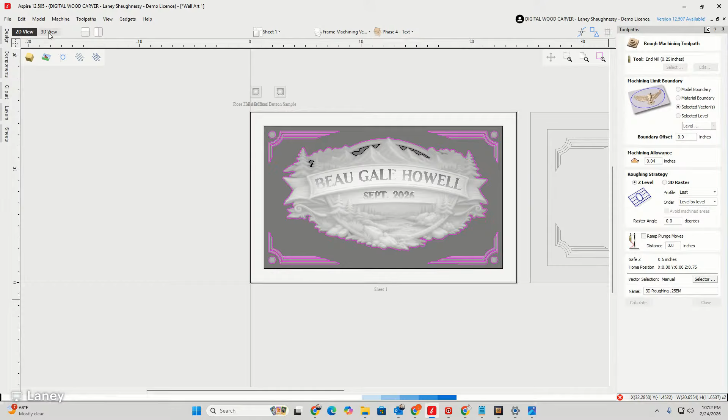And this is going to be our 3D rough, 0.25 end mill. Calculate. Okay, so now the 3D rough is only focusing on those 3D areas and not the project as a whole. So we're going to preview that. It's going to step in levels, take away that waste material that is just waste, doesn't need to be there, right? So it's going to kind of bring those down. There we go.

Now our 3D finish cut, we are going to, again, use the selected vectors as the boundary. This is the only difference here. I need the finish cut to go past the vector lines to blend the models in with that flat area that we pocketed out. If I use the model or the selected vectors as a boundary, then it would stay within those vectors, right? I need the bit to be allowed to go past the vectors to blend in and clean in those models to that area that's already been machined. So I'm going to give it a boundary offset, and I'll allow it to go 1/8 of an inch.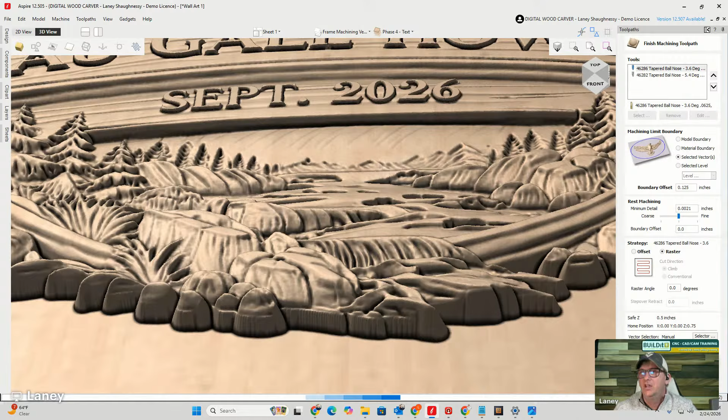And then, hey, Laney, maybe a dumb question. There's never such a thing as a dumb question. What is the longest overall length bit you can use with a 1824? Well, most of your tapered ball nose bits are 3.5 inches in length, right? Anything beyond that is called an extended bit. You have ones that are 4 inches and 6 inches, used for getting into deep cavities, but this is on bigger machines. Your standard 3.5 inch tapered ball nose bit is fine for the 1824.

So your end mills are going to vary in overall length. Your 60-degree 1/4 inch V-bit will be 2 inches in overall length. But yeah, 3.5 inches will be your standard tapered ball nose length, and that's what you would use.

All right, so now let's take a look at the toolpath here. And again, notice that the toolpath is just focusing on the 3D areas, because that flat area has already been milled down. And notice the heavy blue area right here. It's that 1/8 of an inch. It's tapering it into that flat area, so it'll blend it. That's a boundary offset right here, this dark line here. It's allowing it to go past those vector lines and blend it in with the rest of the model. So we'll go ahead and preview that visible cut.

Let that go through. It's going to take just a second on the simulation.

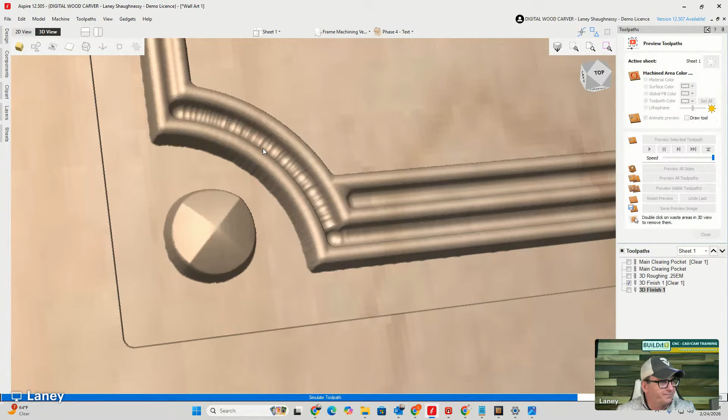So the 1/16 of an inch tapered ball nose bit, that's going to be the next bit. And if we look here, all the areas in the river and everything, that's tool marks, right? So now the 1/16 inch tapered ball nose, all those red lines, that's it moving back and forth. Red is where it's traveling in the highway, Z up and down, and then the blue is where it's engraving. So we'll come in here, and that will go in and clean up in those areas.

Let's see if we can zoom in and see it as it makes the cuts. And you should be able to see in here. Okay. Now, I would be good with this. The 1/16 of an inch tapered ball nose bit gave me plenty of detail. I don't really need to go any lower than that.

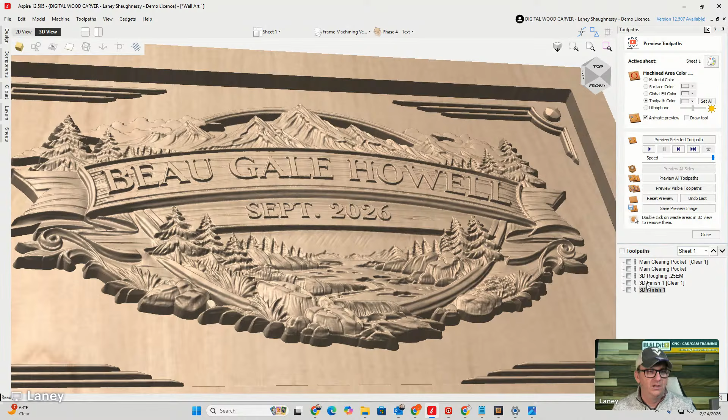But if I wanted to, or if I needed to, get around these letters a little bit finer, I could use a smaller bit. It just depends on, do I want to spend time sanding, or do I want to let the machine do the work? So I'm going to let the machine do the work. And I'm going to add in one more tool. Let's recalculate that really quick. Yeah, cool. All right.

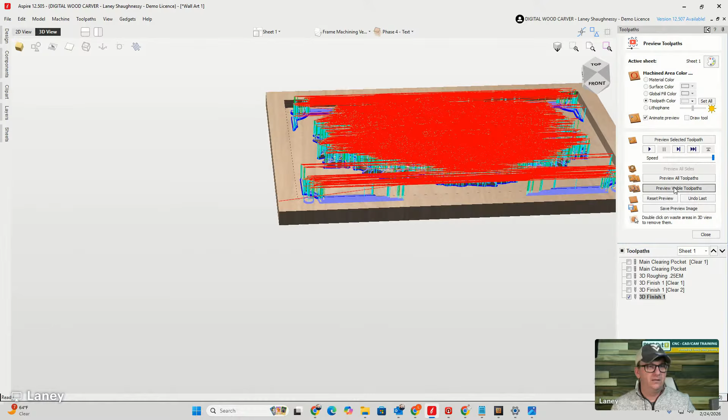It is going in and touching up the last little bit. So if we go in here and take a look at this, in that smaller area, you should be able to see it change as it goes through. It's able to get in there and get a little bit more detail. So around those letters and all.

Okay, so now let's talk about the round over here. This profile cut, or this frame cut: the frame was a 3D model, and had I included it in the 3D cut, my little ball nose bit would have to do both round overs on the edge here. Or if I added new vectors, maybe it did the round over on the outside and then the inside with that small bit, and it would just take forever. And it's a simple round over. It's either a 1/8 inch round over, 1/16 inch, whatever I set it up to be, right?

So instead of including that in the model and it being hours or more minutes, I'm actually going to set up a roundover toolpath. Now I have 1/16 inch roundovers, 1/8 inch roundovers, 3/8 inch roundovers, 1/2 inch roundovers, 1.5 inch roundovers. Got all kinds of roundovers, right? Whatever you want. Now, in this case, I'm actually just going to use the 1/8 inch roundover bit.

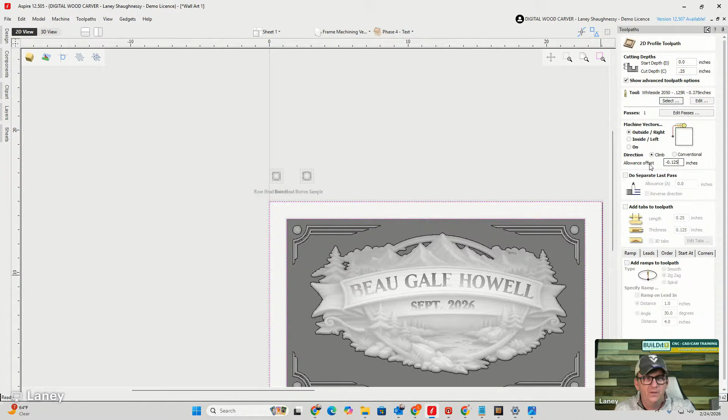And it's going to be a profile cut. We're going to go 1/4 inch deep. I'll use the 1/8 inch roundover. It's going to be cutting on the outside of the line, and it's going to step over 1/8 inch. So 0.125. 1/4 inch deep, step over 1/8 inch. That's based on the geometry of the bit itself. I'm going to calculate that.

And that is going to allow me to run that very fast toolpath to round over those edges to get the result of the frame that I modeled, right? That round over all the way around, okay? Instead of adding minutes, possibly hours, of trying to do the little round over all the way around this 36 by 24 with my tapered ball nose bit, my round over bit does its job.

Now, I don't even have to do it on the table. If I had a router table set up with a round over bit, I could absolutely just take the frame over there, run the round over, and be done with it, right? Whatever it may be. It could be the machine doing it, could be me. Now, this is only a couple of minutes to do the round over here, versus major minutes or hours.

And so pick your battles. That's why I did not include it in the 3D cut. Even though that frame is a 3D model, it's a simple flat model with rounded over edges. All I need to do is run a round over bit on it. Okay.

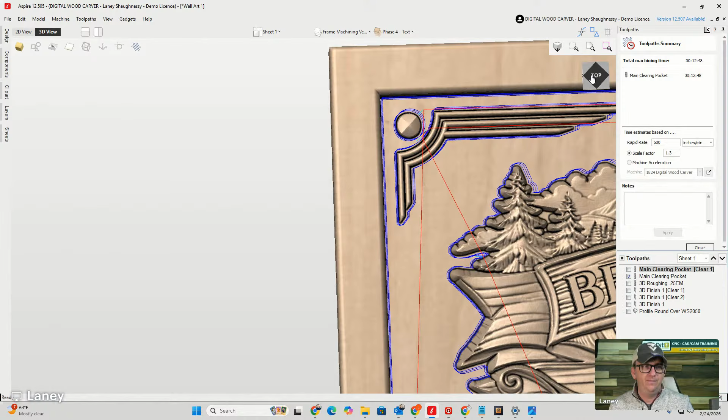The 1/8 inch end mill is just touching up in these blue areas here where the 1/4 inch can't get to. So there's absolutely no reason to do that in 5 passes when 1 pass will suffice. Okay, so I can reduce quite a lot of time there. Now, that 1/8 inch bit right now is only 12 minutes of the cut, but that's still 12 minutes.

If I came in here and I recalculated this toolpath, I don't need to do it that way. If I come in here and I bring this down to 1 pass on that bit, because again, it's just doing cleanup. I'm going to leave the other one at the 5 passes, but when I calculate this, the 1/8 inch bit is just going to come in and do a little bit of cleanup, and let's see if that took off any time. Sure it did. 8 minutes of the 12. So now we're down to 4 minutes, right?

So on my rough cut, I am taking 1/8 of an inch per pass, and that's running at 1 hour and 11 minutes. I could probably do 3/16 even on a hobby machine per pass. It just depends on your rigidity. On my commercial machines, I could do it in 1 pass if I wanted to. So that would reduce that time down.

So on this main pocket, right now I've got it set to 5 passes. It's taking 1/8 of an inch per pass. I could come in and say, okay, let's be somewhat conservative because I want to be clean too. I don't want to be too aggressive. Aggressiveness doesn't win the race here. Tool paths are where profit is won or lost. This is where your machining strategies and your discipline really come into play when it comes to your pricing and everything.

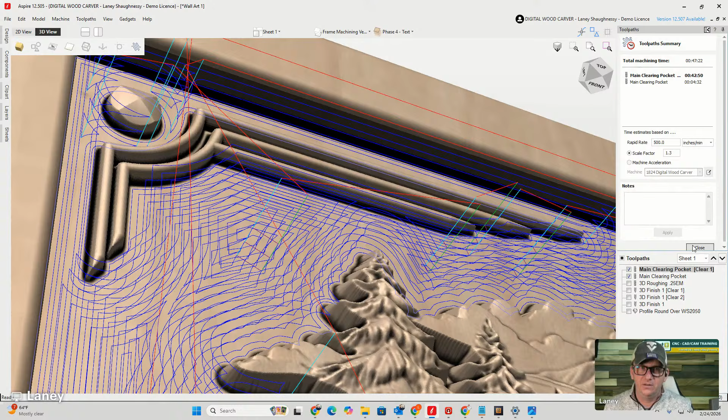Again, not being overly aggressive. The machine can absolutely handle it and produce clean results. We're just being smart. Too few passes is not good either, because it could cause rubbing, burning, chip out and all kinds of things as well. So you've got to really test and get to know your materials and your tool paths. All right. So that's the pocket cut.

Now the 3D rough cut. That's coming in and hogging away the waste material. The 3D rough cut is based on the quarter-inch end mill, and it's based on the 3D model and what it needs to take per pass based on the bit, and the bit is currently set to take 1/8 of an inch per pass. So when I edit this, I'm not editing my permanent tool database, I'm editing just the tool for this tool path.

So here, I can go 3/16. Another 16th isn't going to hurt that bit. That bit's aggressive, not aggressive, that's a bad word to use, but that bit can remove material, and very conservatively. So I can go ahead and do 3/16 per pass on that rough cut and take that hour and 11 minutes or whatever it was a minute ago, and bring it down to 36 minutes. Okay.

So here we took, I believe it was 111 or whatever it was a minute ago, but now we are 30 minutes off. Okay. Just by taking it, instead of 1/8 inch per pass, 3/16, adding another 1/16 of an inch per pass. And you can sneak up, see what your machine can do and all that stuff.

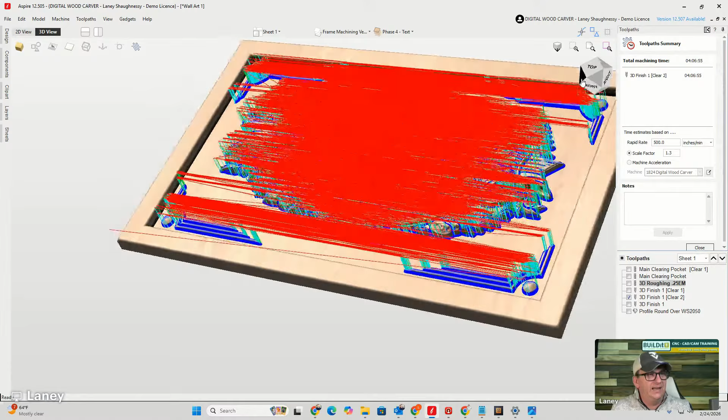But here's the thing. Now we have a 16th inch tapered ball nose that's coming in, and it's even more. And it's like, what? It's doing slightly less, but there's a lot of up and down. You see all those green lines? That spindle is literally coming down, up, coming down, up, coming down. I mean, literally, it's doing this. Whew, that looks like 1,000 times or more. I mean, that's crazy, right? All that up and down and everything.

So what we have to look at is why, what is our machining strategy? Is it the raster or the offset? What is causing that up and down instead of it just doing what it needs to do? That's a lot of back and forth. All that red, it's a lot of back and forth, and it's a lot of up and down. That's a lot of wasted time. So we have to figure out what our machining strategy is and what's causing it. And so if we look at our cuts, for the tapered ball nose bit, we're doing a raster cut. Okay, for the cutting with the grain and everything.

Now the other two bits are rest machining bits. They're just going in and touching up the areas where the big bit couldn't fit. So those, we can go ahead and offset those so they can go in and clean up that area instead of this back and forth, up and down, back and forth, up and down, right? So we're going to set that to an offset. And then the same thing with the other bit, we're going to have that as an offset as well on those two bits because they're just going in and touching up areas. Now, when we calculate this, again, give me a second, let it calculate.

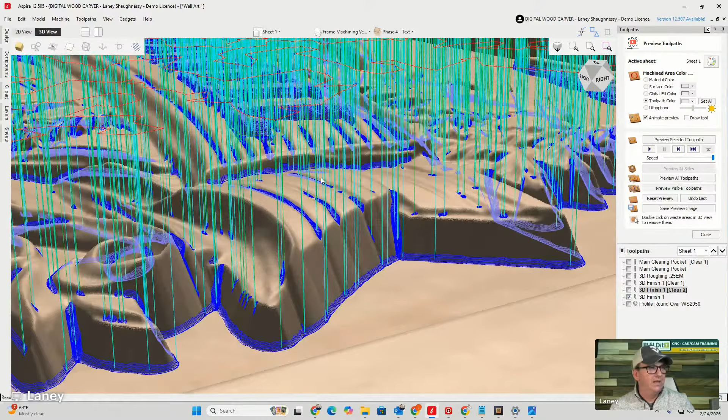Now let's take a look at, you can see here, a lot less red, a lot less back and forth, but we still got a lot of green. So let's take a look. Let's come here and turn this off. On our first bit, our main bit, it has its typical, coming in, moving to the next line, raising up and all. That's fine. The second bit, we got a lot of up and down because it's going in here and touching and all. But let's go look at that third bit. That third bit is going into those similar areas and just kind of literally retouching up.

Again, look at this, turn that off. Look at this, same areas going over each other just because one bit couldn't quite fit. So the smallest bit is going in there doing the detail.

So right now, as it sits, we were at, what was it, 4 hours or something just on that second bit. By changing it from a raster to an offset and getting rid of all that back and forth, we did bring it down to about 3 hours and 12 minutes. And then the big one is the small bit, right?

9 hours. That's our big boy. That's the one that's taken the most work, because it's doing all the major detail and all that stuff. There's a lot of up and down, a lot of up and down.

So all together right now, the 3D machining on this, based on my speeds and feeds and my tool settings and blah, blah, blah, we're looking at an estimated time of 16 hours of runtime on this piece. It could be much less. If you have a commercial machine that runs 1,000 inches a minute, you could probably shave it down quite a bit. But for hobby units and mid-size units, we're talking a long time here.

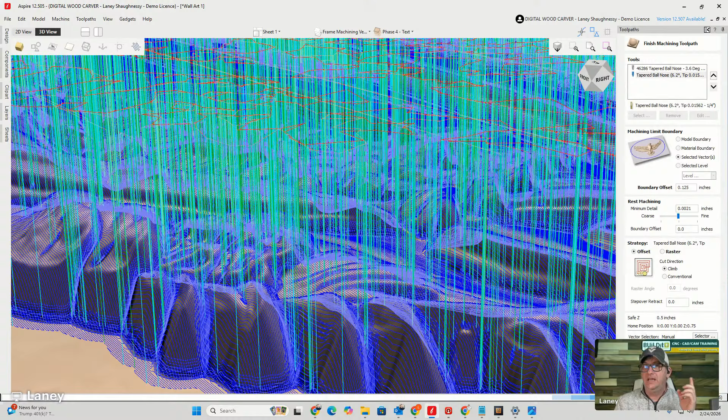Stick with me. 6 minutes in. Hang with me, ladies and gentlemen. Just a little bit longer. Let this calculate, and we'll see if we've helped or hurt ourselves. Did we help or hurt ourselves?

Almost there. A project with the level of detail and everything, conservatively, we're probably going to be in that 15, 16 hour range, or slightly less. We'll see here in just...

All right, so now we have the 1/8 inch tapered ball nose coming in and doing its clean. And then we have this one. Still a lot of up and down, but now it's going in. Let's see what our times are. We are at 3 hours and 15 minutes for the 1/8 inch tapered ball nose, 14 hours and 55 minutes for the 32nd inch.

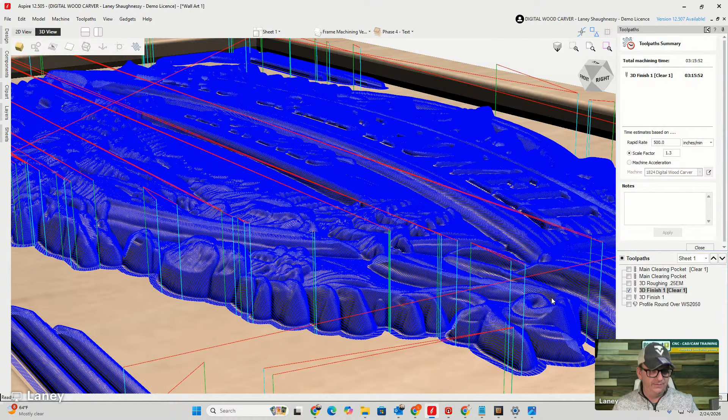Without the 32nd, the 16th inch gave us decent detail, but not great. Again, it's what takes a quality sign from being a $60 sign to a $260 sign, right? So here we're going to be at 18 hours, 11 minutes, overall a total of about 20 hours of machine time. Now, 19 hours and 39 minutes estimated machine time.

Now, let's translate that into machine cost. So we're going to go over here into our products.